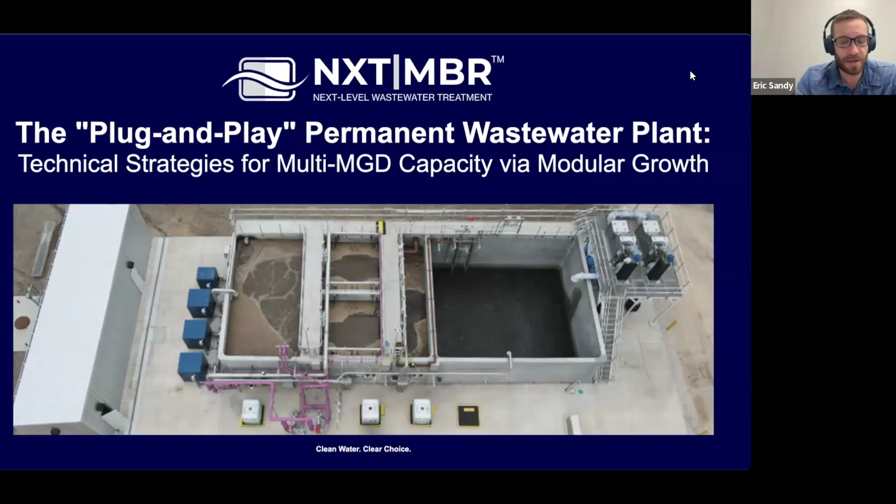We're also pleased to share a new white paper from the teams at Integrated Water Services and CROM to all registrants, furthering the conversation on today's topic, which is, of course, the plug-and-play permanent plant: technical strategies for multi-MGD capacity via modular growth. For decades, the water industry has operated under a familiar trade-off: deploy fast with modular systems or build to last with traditional civil infrastructure. Next MBR was designed to eliminate that choice. Today's session brings together the engineers, executives, and project managers who built and delivered the first permanent concrete modular wastewater system, and we will use a real project, the McKinney Roughs Nature Park expansion outside Austin, as the technical blueprint for everything we cover.

Leading our discussion is Todd Bernetti, Senior Vice President of Municipal Solutions at Integrated Water Services, who brings nearly 30 years of hands-on experience across every stage of water and wastewater infrastructure, from pipe layer to plant operator to system designer. Joining him is Bobby Oyenarte, CEO of CROM, who leads a 700-person organization with 28 years of experience in water infrastructure design, construction, and restoration. And rounding out the panel is Steve Mendoza, Senior Project Manager at Jones-Heroy Associates, a civil and chemical engineer with 35 years of Texas water infrastructure experience, including work with the TCEQ, the Texas Water Development Board, and the EPA.

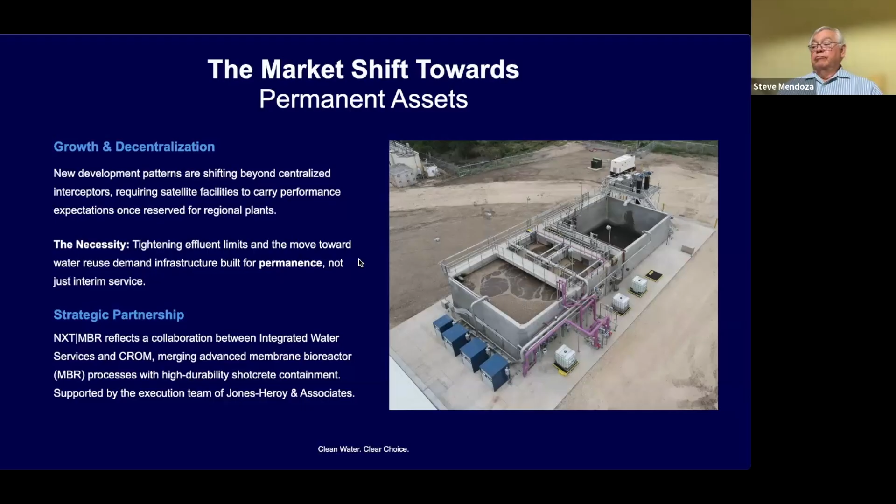So as we were developing the model for the Next MBR, we wanted to come up with a seamless solution. So vertical integration is key when you get to seamless solutions. A big problem we saw is that the entire process train wasn't being provided as a package. Next MBR allows us to have a single process design, single platform, and it's designed around operators with operators' consideration.

Steve can speak to this a little later, but one of the big key points here in partnering with CROM on this solution is we got a lot of input from operators across all facets. And while we have smaller modular solutions, we really believe that as the decentralization boom expands, you're going to see more and more of this and the need for an expandable platform.

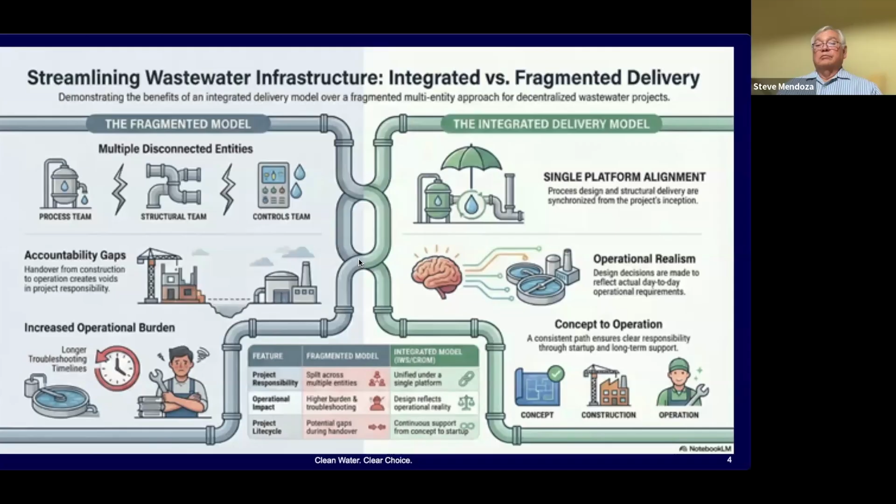Next slide. So one of the big constraints for smaller municipalities or private utilities or developers is your CapEx. So in order to get into a facility with uncertain growth potentials, with the housing market having ups and downs, having a modular approach that's scalable, that's fast to deliver is really key here.

We designed Next MBR in 250,000 gallon a day increments, all the way up to a 1 MGD module. And then it can be expanded out in 1 MGD modules from there going forward. So they're only paying for the infrastructure they need at that time. And as we get to the case study, we'll point out how we were able to do that at that particular location, McKinney Roughs here in Texas.

So as we can control their capital outlay, then they have a client base and a stable financial platform to account for infrastructure expansions at the right time. We're also able to eliminate the risk model and the conundrum of the Spearin doctrine, where we still partner with the engineering houses, but the risk of ownership for the design liability lies with the fully vertically integrated design builder.

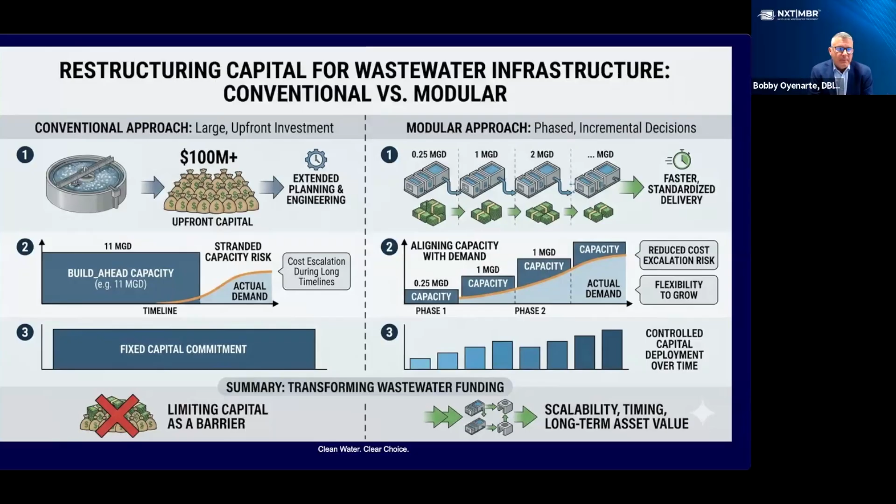When we talk about Next MBR, what's really amazing is this is the first system to incorporate an entire vessel-wide process, meant to last the test of time. And we do that with a technology called CROM squared, a technology that has been used for 74 years.

And we've taken watertight details, construction methodology, and all that experience, and rolled it up into this new tension shotcrete system that provides a 50-year design life with a useful life that goes far beyond. And we're able to do that utilizing the really robust ACI 350 design, but then also the water tightness of D110. And so we've combined those two exceptional standards to create this really great vessel to house the MBR system.

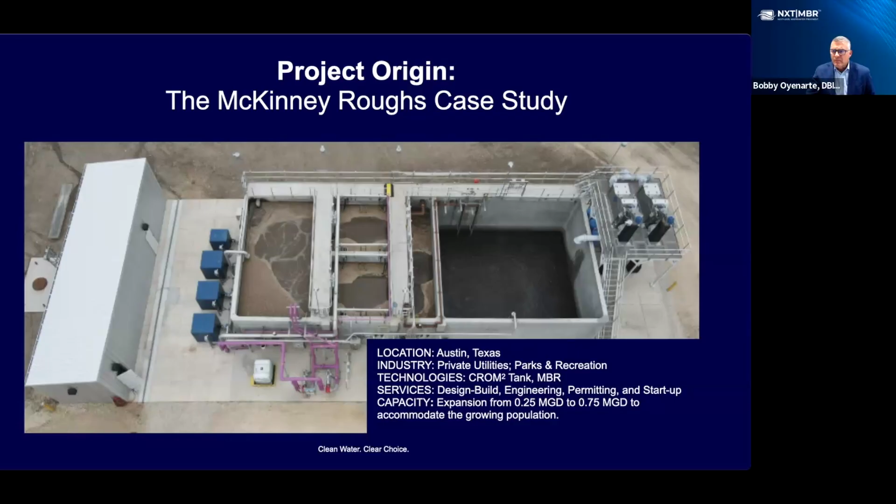So out there at McKinney Roughs, we discharge to the Colorado River Basin in that area. So the effluent requirements were really tight. And when we were looking at a conventional activated sludge facility for that location originally, with tertiary treatment added to it to get to the same effluent quality you could do with MBR, we decided to pivot to MBR.

And through value engineering, reduced footprint and construction time, we were able to deliver this project in 12 months, running some of the design concurrent with construction efforts. The tank itself, and Bobby will get into some of the tank construction here in a little bit, was constructed in 13 weeks. And we were able to do the rest of the site civil and the balance of work in quite an expeditious fashion at this location. Next slide.

So scale. We took a look at that facility, and originally they had a 36,000 gallon a day MBR plant on that location, and they needed to be able to go from 250 to 500,000 gallons a day initial phasing. What the next MBR allows you to do at this location, in the exact same footprint that you saw two slides earlier, is go from 250,000 gallons a day to 500,000 gallons a day, which is 71 feet by 32 overall.

Meeting the regulatory requirements, there was a lot of protest on this particular discharge permit. And so you'll see in a lot of the photos that it is set up for purple pipe. We went ahead and designed this facility around Title 22 regulatory compliance, so it'll meet the tightest reuse standards in the nation at Title 22. Next slide.

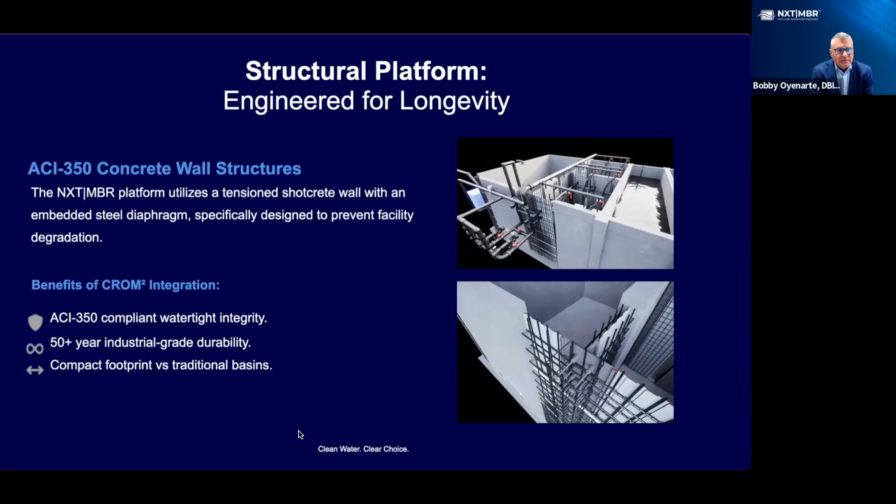When we were developing the next MBR, we wanted to make sure that we had consistent, repeatable design. So in consistent, repeatable designs, what we've done is your basic basin layout will be the same regardless of the size of your facility. So consistency across the board. The aerated zone, MBR zone, anoxic zone, and EQ zones are all in the same locations on every single one of these plants. We can reconfigure the catwalks on top. If that's something that's desired, we can make some minor tweaks and changes to the overall facility.

But at 250 to 500,000 gallons a day, you're 71 by 32. When you go to 750, the plant just gets 21 feet longer. And then when you go to 1 MGD, it's as long as a 750, but the plant gets 8 feet wider. And then for other considerations, one thing that we haven't talked about yet is the overall basin depth on this facility is 16 and a half feet deep, with the highest water height being 15 feet.

So when you take a look at that, we can also bury the structure, all but the top foot. And so when you can do that, you can make these facilities less apparent to the eye. A lot of them are near neighborhoods, a lot of them are near schools. And instead of being this giant concrete monument, you can completely bury this tank.

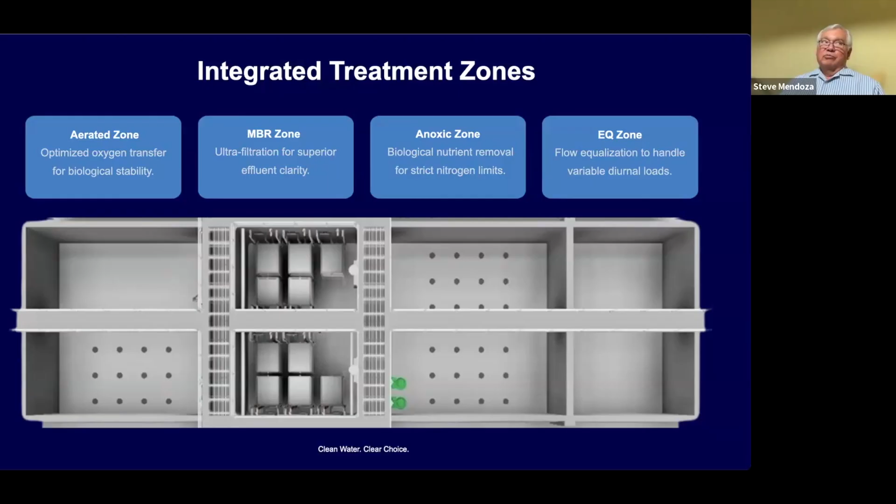So this makes the operators happy because they're not having to manipulate their schedule to be on site to have the sludge hauled. And it makes the ownership of the plant much more pleasing when you're not spending as much money transporting your sludge. Sure. And that's a big cost. Yeah, we've actually calculated this out recently, because depending on which state you're in, we're seeing prices anywhere from 31 cents a gallon sludge haul cost to 63 cents a gallon in other regions. And you start adding that up.

So we did the mean average on a 100,000 gallon a day facility, and on just a 100,000 gallon a day facility, you can be saving in OpEx as much as 11,000 per month on sludge hauling costs with this system versus conventional plants. Conventional plants, you're typically wasting in the neighborhood of 10 to 12% of the total daily volume. And with MBR technology, we're only wasting between 2 and 2.3% of the total daily volume. So we're further reducing the total sludge hauling costs by as much as 10% also.

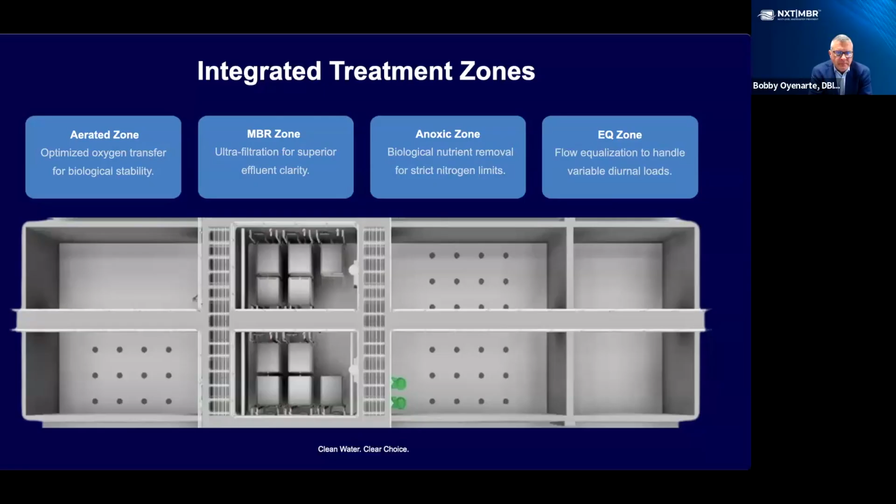The nice thing about, especially, we have really strict effluent permit limitations in Texas. And it's amazing. The regulatory agencies find the technology to measure something and they immediately think they have to regulate it. When I started with the regulatory agency out of college, a 10-15-3 was the standard permit. We still had some 20-20s, but we're getting down to almost nothing. 3-5-1-1, 3-5-1.1, 3-3-1-1. I mean, it's amazing.

And the more stringent that effluent limitation is, the more expensive your plant becomes. But the MBR technology, these membranes, are able to just make treatment an easy thing to do. If you have an operator that's competent and is familiar with the plant, then he can put out some premium effluent quality. And the last thing that plant owners want to deal with is getting hit with fines from the regulatory agency. And in Texas, it can be up to $10,000 a day.

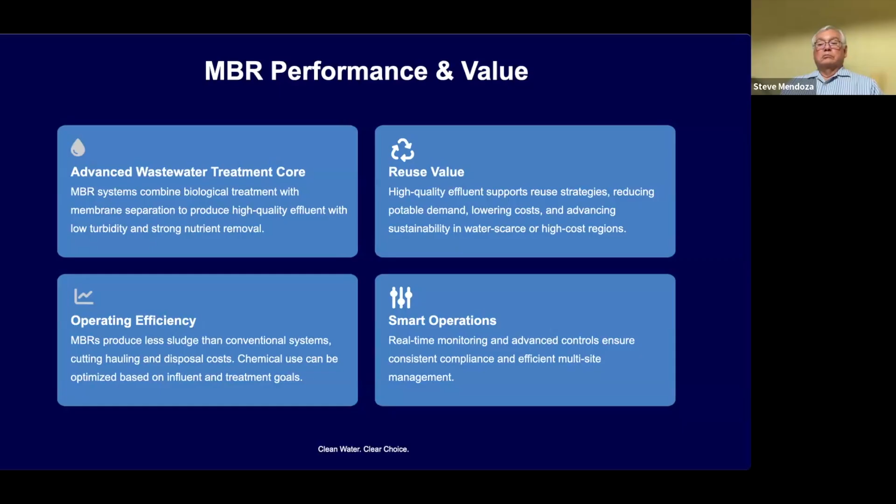So overall MBR performance, there was a point in time where MBR had a larger CapEx umbrella to market versus conventional plants. What we've seen trending as of late is MBR treatment is either the same as conventional treatment platforms or less than conventional treatment platforms. And a good portion of that comes in the overall OpEx as you're going down the road. In other words, you don't require as much land, so you can regionalize pretty well with a decentralized system. And we're seeing a lot of developers do that. They're getting permits for larger volumes than they're going to need for their independent development because they're anticipating additional growth around them, and they're going to be a small regional purveyor of that area.

Sludge management, just without thickening, we're at a 40% reduction in overall sludge generation. And when you take a look at that, you add thickening to it, then that drops even further. Optimize power usage. We go through and everything that we design around has a 10x turndown. So we do that so that we can build these facilities and manage the power consumption at them at a very high level.

Getting to tight effluent limits, like Steve was talking about, as you push down and you start getting to those tighter limits, we are very conservative in these designs. In other words, we try and get to these tight limits. We have clients coming to us that are standardizing around a 0.2 phosphorus, even though they may not be permitted for that presently, and getting down to tighter and tighter limits. As we push down there, we can adjust these plants and fine-tune them to the point where their chemical demands are significantly lower as well.

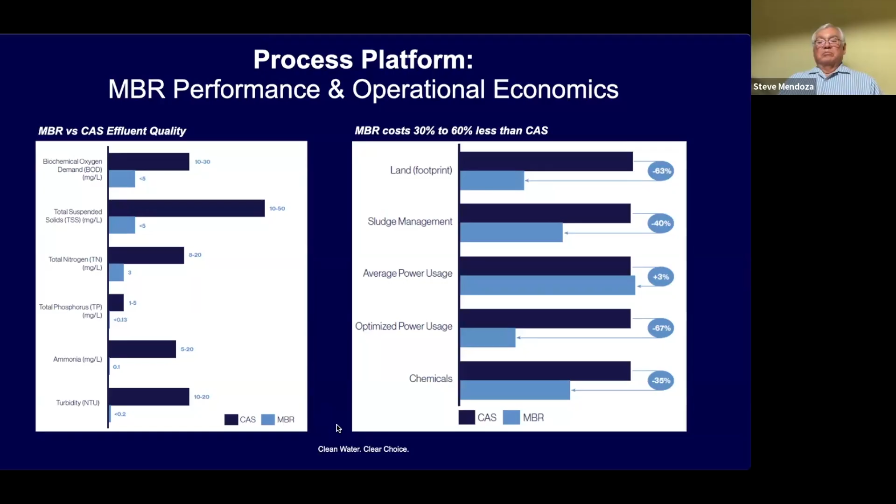So as we work with clients across the country, one thing we're seeing is a large uptick in private utilities and towns. When we say that, these are clients that are particularly interested in the longevity of the product overall. In other words, they don't want to be reinvesting in 15 to 20 or 25 years on a lot of the systems that we're actually replacing at this time in brownfield type applications.

So as they push forward into that space, OpEx becomes a large consideration, life cycle becomes a large consideration, and being able to deliver an integrated package overall is really a huge value to them. We're also seeing the same trends in commercial and real estate, and then in some of the industrial sectors as well. For high strength wastewater streams, we can take the CROM technology and combine that with some of our other technologies prior to MBR, like jet mixing or jet aeration, and address those industrial treatment situations, and be able to deliver a very similar project for the industrial sector as well.

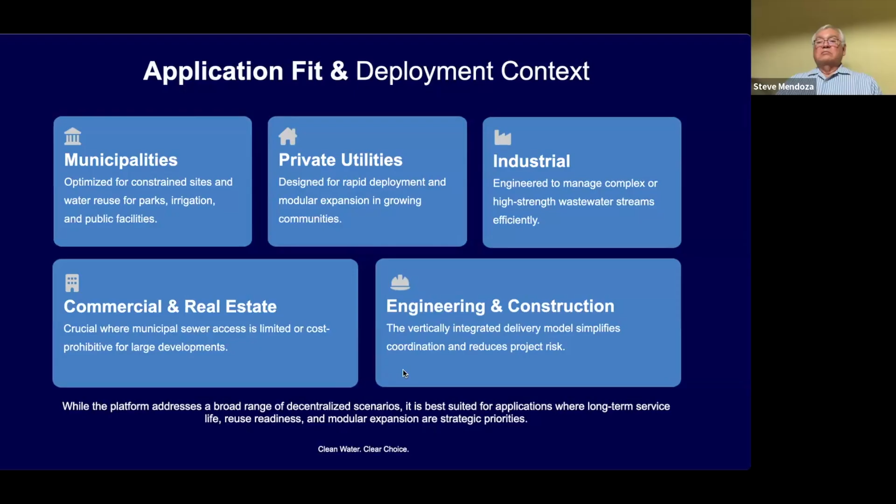Bobby, you want to capitalize on this? How we work with engineers? Yeah, I appreciate that. I think a couple points are, we love partnering with the engineering houses. It's so important because they have their finger on the pulse of the owners in most cases, and understand the client needs. So this doesn't bypass the need for the engineering houses. Very similar to the engineer-led CROM methodology we've been doing for 74 years, we've been partnering with engineering houses.

We do perform turnkey design, build, engineering, and construction, meaning we own it. No division of responsibility. The Spearin Doctrine issue goes away. Okay. And what's also very important, I want to reiterate this point, is this is a formless shotcrete system with 0 horizontal or vertical joints. No interior coatings required, no stripe coatings for sealing. And what's important about that is when you have a homogeneous layer of shotcrete that's put into permanent compression, you eliminate regularly occurring maintenance.

And so it's designed by professionals, built by professionals, warranted by professionals that have been here a long time and will be here for longer than me, to continue to service the industry. And when we do that, what do we do? We eliminate risk. We de-risk the project, right? We provide a system that is easy to operate, lasts an exceptionally long time with little to no maintenance required.

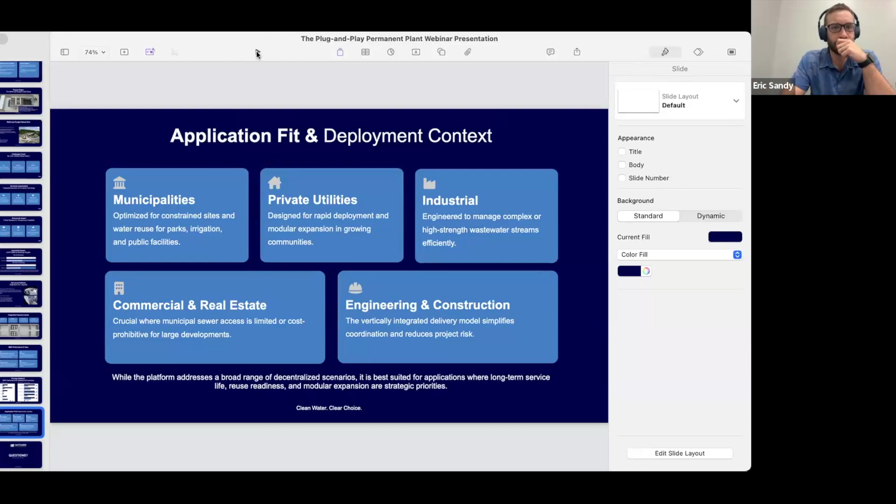Yeah. So my experience as of late has been people wanting to standardize around a solution, especially smaller purveyors or private utilities. We have a lot of modular solutions. We have Blue Box. We've got some expandable stainless solutions as well. And those are outstanding options if your facility is never going to be, say, bigger than 350,000 gallons a day, right? But a lot of our private utility clients, to some of Steve's points earlier, they're looking for lower CapEx.

And a lot of them have purchased our smaller modular solutions, and they're moving those around from site to site for their phase 0 or their phase 1, if you want to call it that. And then running concurrent while that facility is online, they're designing their next MBR facility. It's highly attractive in coastal regions due to the fact that it's concrete and doesn't have a lot of corrosion issues. So we're seeing a high demand on the Carolina coast. We're seeing a high demand in Florida. We've recently been having some conversations with some utilities in the Hawaii area. So that's also a big driver.

And then the fact that we can meet high seismic conditions, all the way up to one lateral G with most of our equipment. We can go into regions in California where other solutions may not reach, may not adhere to those seismic requirements that are out there.

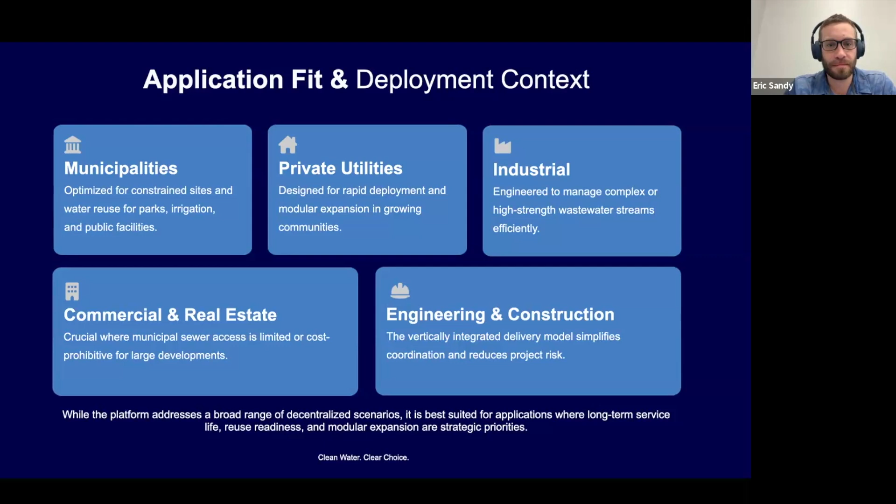Yeah. I love visiting the site, and I was there when the operator dropped by, and he showed me his tablet where he was operating the facility, and I hope I don't get him in trouble. He said, "Yeah, I haven't been to this facility in 2 weeks because I can see everything that's happening right here on the tablet."

And seeing a facility that's crisp, it's clean, it's compact, it's easy to operate, it's smart technology. I just couldn't be more proud of what the team has created, and the wow factor of all the visitors when they leave the site. They just couldn't be more ecstatic about what we've completed, and then to get the pricing where they're like, oh my gosh, I can have all of this, and you guys are doing it for far less than what traditional facilities are costing.

Yeah, to capitalize on what Bobby said, one of the outcomes we weren't initially anticipating was our ability to go to market with it and have a very compelling value proposition as far as what it takes to get into larger facilities dollar-wise for purveyors and for private utilities and developers. In saying that, it's a great product. Initially I looked at it and I said it's the miniature muni solution, right?